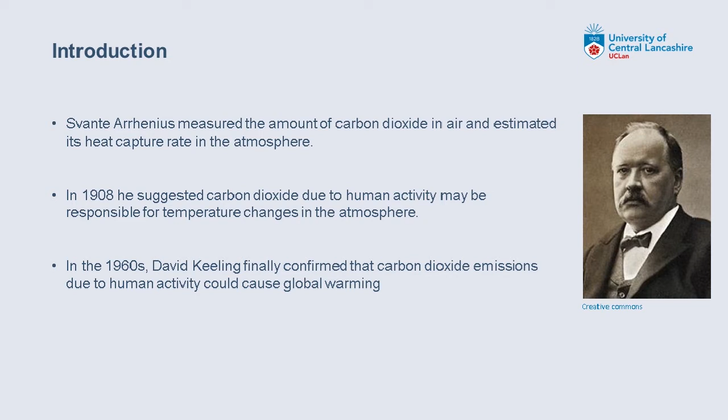Back in those days, climate warming was considered to be a good thing because scientists in those times thought that it would allow greater production of food. As we worked through the 1900s, it became more and more clear that climate change was due to human activity. And in the 1960s, David Keeling was the first person really to get a good grasp of the fact that human activity was definitely causing global warming. It still wasn't certain in a statistical sense, but the concern was so great that this organization was formed, the IPCC.

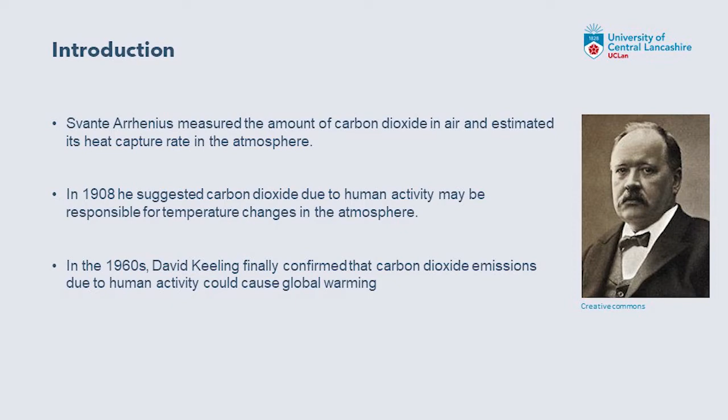The IPCC was established in the late 1980s by the United Nations and the World Meteorological Organization. And its objective was to provide a clear scientific view on the current state of knowledge in climate change, as well as observe its impacts.

The IPCC itself does not do any scientific research. It collects together scientific, technical, and other information from other authors and tries to produce an average of that information. And it produces occasional reports. So far, 5 assessment reports have been produced to advise government policy around the world. The next report will appear in 2022.

Some conclusions from the last report are quite disturbing. It's established to a 95% confidence limit that human activity is the dominant cause of global warming since 1950. Obviously, the increase in carbon dioxide in the atmosphere is causing this, and if we look at the changes in these so-called greenhouse gases over the last 800,000 years, levels are at their highest over that period of time. And much of that increase has taken place during the last 100 years or so.

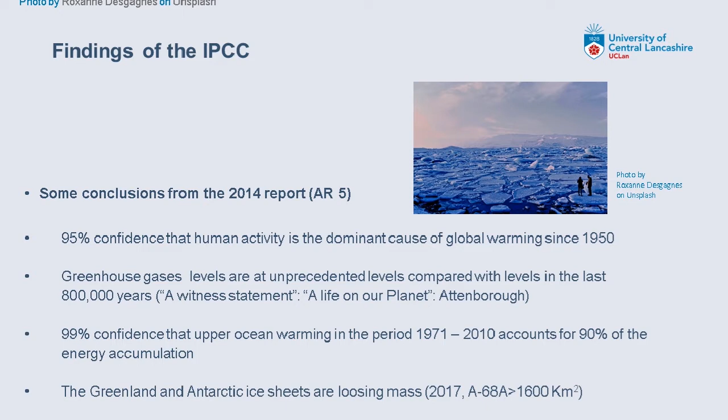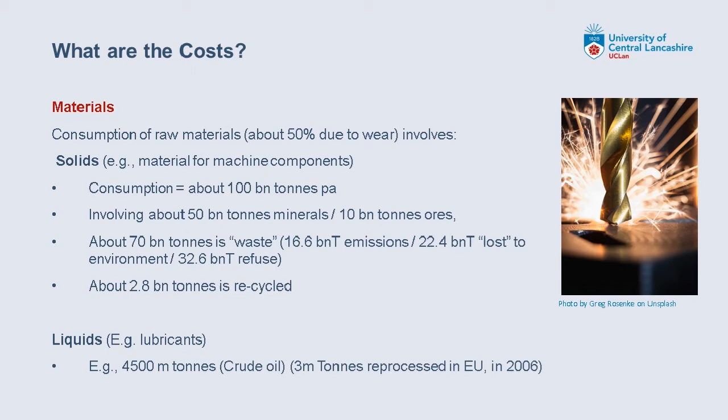We see a similar picture in the context of liquids. Across the planet, we consume a huge range of different types of liquids. Obviously, one of the ones that's relevant to tribology is lubricants. And globally, we would use about 4,500 million tons of crude oil, and much of that will be lost into the atmosphere or lost into the ground rather than reprocessed. You can see this very small figure of 3 million tons being reprocessed in the EU in 2006.

So what can we do about that? Well, back in 1966, Lord Bowden invited an industrialist called Peter Jost to try and identify what was causing the very large amount of money lost in maintenance costs. So the UK was still recovering from the Second World War, and we'd seen the very rapid installation of machinery for conventional manufacturing, moving away from the defence industry. That had been done very quickly and very suboptimally. So by 1966, a large amount of money was being used to try and maintain this equipment.

Peter Jost and his panel, which you see here in a room in the Institution of Mechanical Engineers on the right, were invited to try and understand why this was happening and to offer proposals to the government to put this right. They produced a report which is commonly known as the Jost Report, and you can see the copy from the University of Central Lancashire there on the right of the slide, quite well used.

And within this report there were a wide range of recommendations, including things like establishing a network, in fact, of national centres of tribology, recommendation to teach the good practice in tribology in universities and so forth. One of the interesting factors was that the economic savings were very significant, in the hundreds of millions of pounds even in the 1960s. And only a small proportion of these savings were related to reducing energy use. Energy was cheap in the 1960s compared to where we are now, and this was a very small component of their thinking.

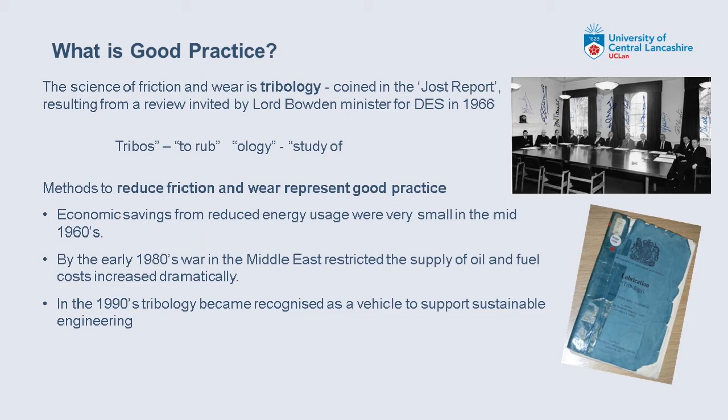So one of the things that the Jost Report recommended was good practice in tribology. Tribology is focused on operating devices more efficiently to reduce friction during operation, and also minimizing wear to reduce the use of materials, and also to reduce energy use during production processes as a secondary effect.

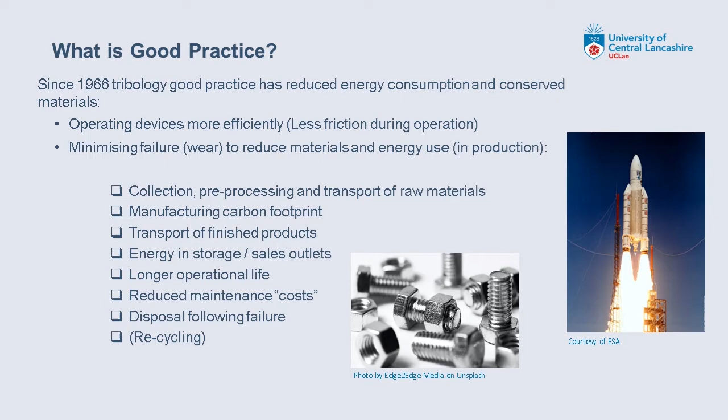And we can see that in that situation then we reduce the collection and pre-processing and transport of raw materials, we reduce manufacturing carbon footprint, we reduce the amount of transport required of finished products, and so on. So it starts to be a very positive feedback loop which is generated by using fewer materials and reducing wear. And as you can see, it covers a whole range of applications, from simple tribological components like nuts and bolts, threaded fasteners, right through to spacecraft.

However, as time has gone by, the impact of tribological development has begun to increase. One of the important trends that we see in engineering is that people expect to be able to operate at bigger loads, higher energy densities, higher speeds, lower weight, reduced cost, and increasingly with a lower environmental impact. And tribology, for decades now, since the 1960s, has facilitated this by a range of interesting and different trends.

So one of the trends, for example, is the use of lower viscosity lubricants. And if we use lower viscosity lubricants, we can reduce viscous drag and reduce energy loss in hydrodynamic contacts, for example. One consequence of that is that the lubricating films in these contacts get thinner and thinner, and I'll come back to that in a moment.

We also see the development of environmentally friendly lubricants, probably better described as environmentally adapted lubricants. They are less damaging to the environment, but in many instances their performance is also not as good, so they decompose more easily and they have poor compatibility with other materials such as rubber seals, for instance.

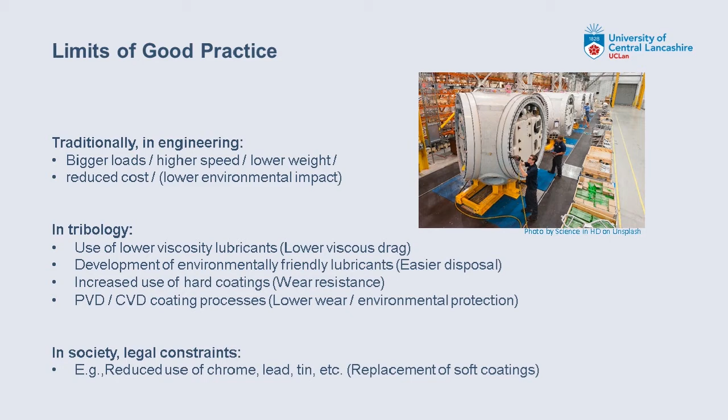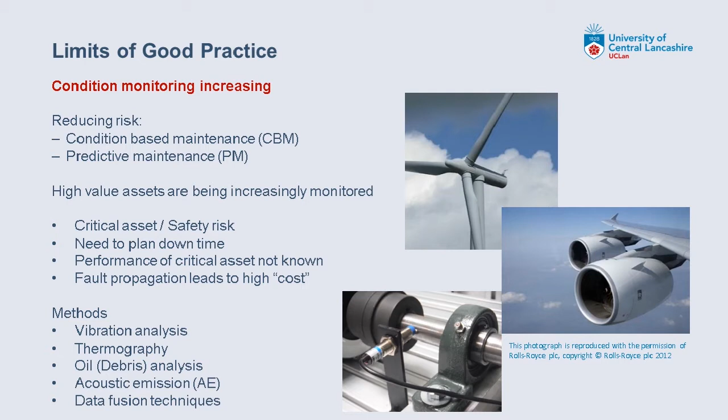And we would apply these kinds of techniques where an asset would be a critical asset in a large system, where there's perhaps a significant safety risk, where we need to plan the downtime of a machine for maintenance, and perhaps where we've got a new kind of device, a critical asset, and its performance isn't known. Anywhere where fault propagation might lead to a high cost. And we've got this wide range of different kinds of measurement methods as well to apply, so vibration analysis and acoustic analysis and thermal analysis and so on.

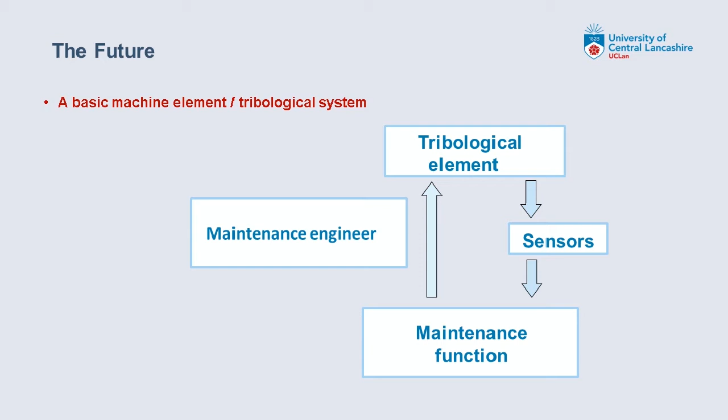And we operate this kind of scenario within a loop like this. So the tribological element is monitored by the sensor. The sensor allows data to be observed by a maintenance engineer. The maintenance engineer at an appropriate time then would go and apply either perhaps a replacement part or some kind of maintenance activity on the tribological element. And the increasing use of sensors means we can do this in a more and more efficient way.

However, what I'd like to propose is that we move to a more complex system in which the tribological element is monitored by the sensor, and the sensor sends its output to a control unit which can automatically operate an actuator to modify the operation of the tribological element. And you can see associated with this there can be a user interface, so this tribological element can be monitored, and we can also send information to machine learning systems, which might be web-based or might be part of embedded intelligence in the machine, so that machine elements can operate in much more optimal conditions.

This might seem far-fetched. However, I'd like to draw your attention to the fact that things like automatic braking systems have become very commonplace over the last couple of decades. Most cars have automatic braking systems now to control wheel skidding. So if each of the wheels on a car has its rotational speed monitored, if we apply the brakes and 3 of the wheels are rotating but 1 of them isn't, then the automatic braking system can do something, perhaps release the braking pressure on that specific wheel, to allow it to rotate and allow the driver to retain control of the car. This is a Tribotronic system, and it's very common, it's very widely applied.

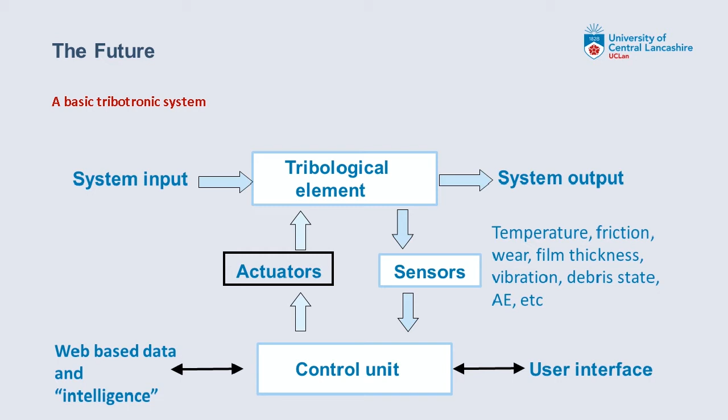Also in automotive applications, we've got things like automatic gear changes, automatic transmissions. And within these transmissions, we have actuators which can control the contact pressures on the transmission elements as gear changes take place. Again, entirely automatically through a feedback loop like this, completely without the knowledge of the person driving the car.

In addition to this, we see lots of other trends taking place in engineering as well, which we can take advantage of in order to build our tribological elements. So we have low cost, embedded intelligence, sensors, we have communications technology such as Bluetooth, we've got internet connection of machines through the Internet of Things, and we've got smart materials and smart coatings that allow us to do increasingly helpful things in terms of being able to have self-repairing parts which communicate their condition perhaps through thermochromic dyes and so forth.

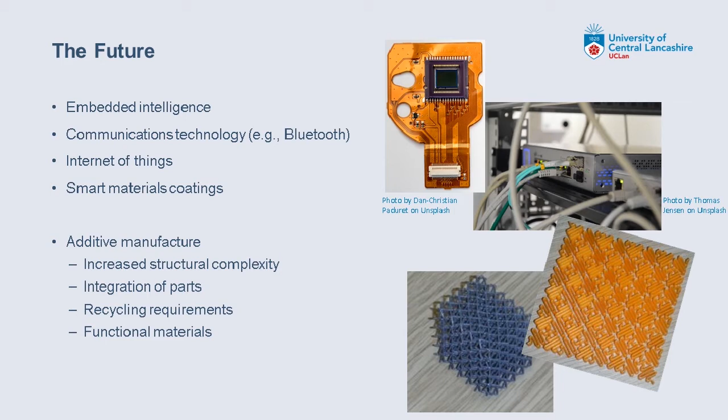We also have the very rapid development of additive manufacture, which we can use to manufacture parts which would hitherto be either very expensive or impossible to manufacture through conventional techniques. And we can build these parts that have functional properties as a consequence of their geometry. We can integrate sensors, we can make them so that they are more recyclable, and indeed we can build these parts out of recycled materials. And we can also incorporate functional materials within the structure of these different kinds of parts.

So if we think about the evolution of a bearing and how it might look in the future, on the left-hand side, perhaps 3 centuries ago, a journal bearing was a straightforward circular cavity into which a rotating shaft might sit, perhaps either dry or with some kind of basic grease-type lubricant.

And as we've moved through the centuries and through the Industrial Revolution, this arrangement has become increasingly sophisticated. The spacing between the shaft and the bearing has been more accurately tailored to the function of the device. We've begun to understand in the 1800s how we can predict things like the load carrying capacity of the bearing, where to put the grooves, where to put the oil supply hole, and so forth.

And as we've moved through the 20th century, we've gained control of the materials of this component. So the microstructure of the coatings and the microstructure of the material of the bearing have improved and allowed the performance of this device to get better. And where we are at the present time now, we have these quite sophisticated components, even though they might look outwardly simple. We're beginning to use asset management through condition monitoring and predictive performance.

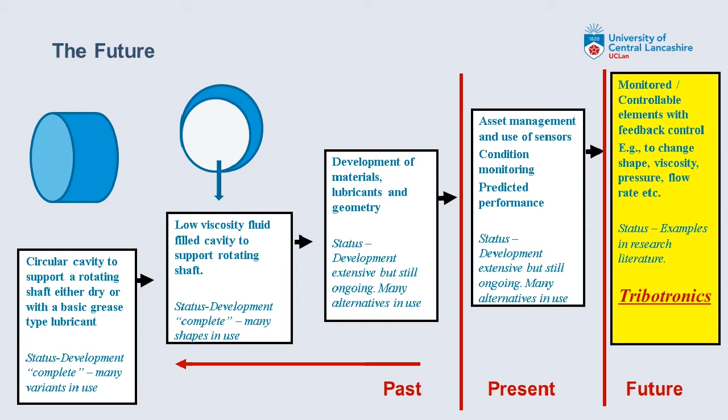What I think we'll add in the future are these controllable elements with this feedback loop that allow us to directly change the properties of these devices, changing their shape, changing the viscosity of the lubricant, changing the flow rate of the lubricant, and many other properties of these devices to both keep them operating longer and to make them functionally more effective. Tribotronics, a feedback loop involving sensors and actuators.

At the University of Central Lancashire, we've been developing different kinds of tribotronic components now for some years, and I'd like to show you a few examples. This first example here is a lip seal. You can see on the top left the structure of a lip seal. At the bottom, unfortunately I can't point to these slides, apparently there's no pointer in the system, but at the bottom of the lip you can see the shaft, and that lip is pressured against the shaft using a spring that's built into the device and the natural compliance of the seal itself.

The graphs to the left are effectively derived from simple capillary models of the contact, but the purpose is to try and illustrate how this device behaves. So on the top graph you can see that as the film thickness between the shaft and the lip seal increases, the flow rate, or leakage if you like, of this device also increases. On the bottom slide you can see that as the film thickness increases, then the power loss goes down.

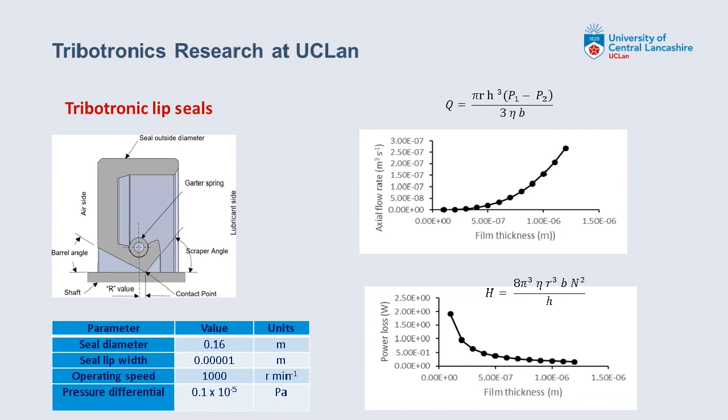Another project that we've got is to develop a feedback control system for a large two-stroke marine engine. These engines operate with an isolated cylinder because they use very low quality fuels. There's a lot of sulfur in the fuel, and that generates sulfuric acid during combustion processes, and the arrangement prevents these sulfuric compounds reaching other parts of the engine and causing corrosion. As a consequence, lubricant is supplied to the top of the cylinder by a spray, and this lubricant conventionally will contain an alkaline additive to counteract the production of the sulfuric acid.

So as the engine might increase speed or need to increase power, a larger amount of lubricant is injected into the engine in order to make sure that an appropriate quantity of additive is supplied to compensate, to reduce the corrosion. However, that means that far too much lubricant is injected into the engine.

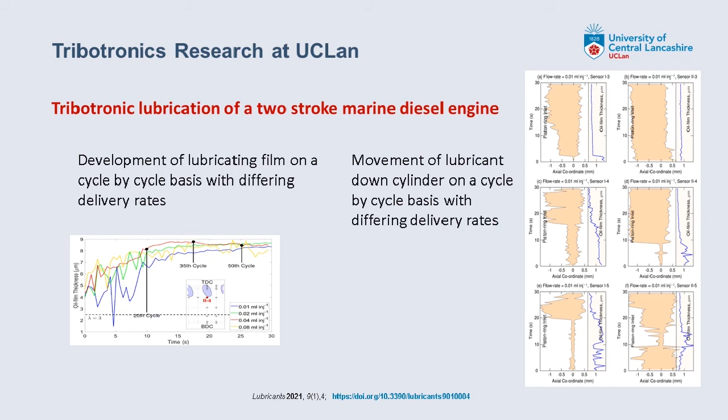So you can see the top two are filled fairly quickly, time starting at 0 at the bottom on the y-axis. But the lower down that the sensors are placed in the cylinder, the longer it takes the lubricant to arrive there and start to do its job. Now, this might be quite obvious, but until this test equipment was built, nobody really had any idea of how many strokes or what period of time this process took.

Some of the advantages that we can think about might be derived from a system like this if it was fitted on a ship. First of all, that it does separate the lubrication system from corrosion control system. And the value of that is that it does permit very large quantities of lubricant, in principle, to be saved by this device.

Of course, there's a double benefit. We get lower emissions, as I've explained. So we see lower amounts of carbon dioxide going into the atmosphere. The operator sees a benefit from a lower operating cost. We should have better corrosion control as well, because it's not good to supply too much or too little of the additive to counteract corrosion.

And it's automatic. I'll come back to that in a little while. And it's also bespoke to each system. So each ring and each cylinder can moderate itself independently in order to control these parameters.

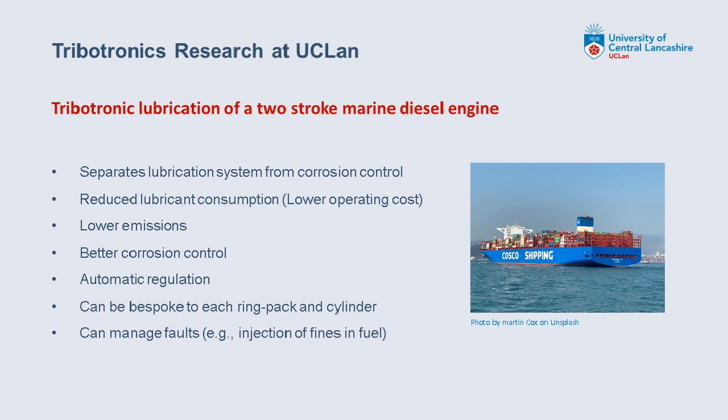Finally, this is a project that we've just started recently. Tribotronic control of tilted pads. Tilted pads are used in a wide range of applications. They may be quite small on the scale of millimeters, or they might be quite large, as in this example. If you take one of these pads, it's probably about the width of a couple of adult hands. And these pads are used in applications like hydropower stations or submarine propellers, that kind of thing.

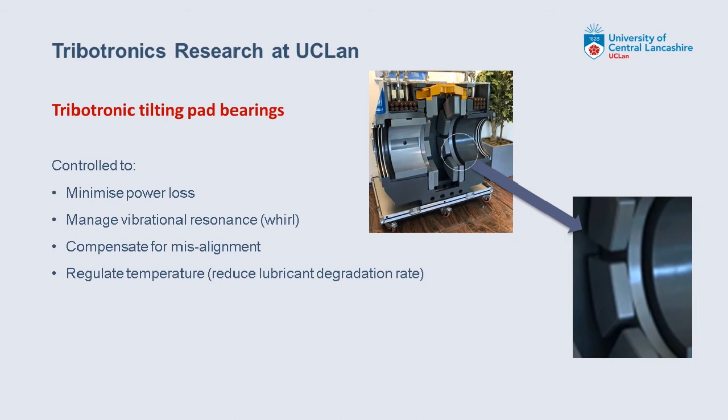And controlling them should offer some useful opportunities. So we should be able to minimize power loss, for example. We should be able to manage their vibrational characteristics, certainly move around from their resonance points. We should be able to compensate for misalignment and regulate temperature to reduce the degradation rate and have longer lives of lubricants.

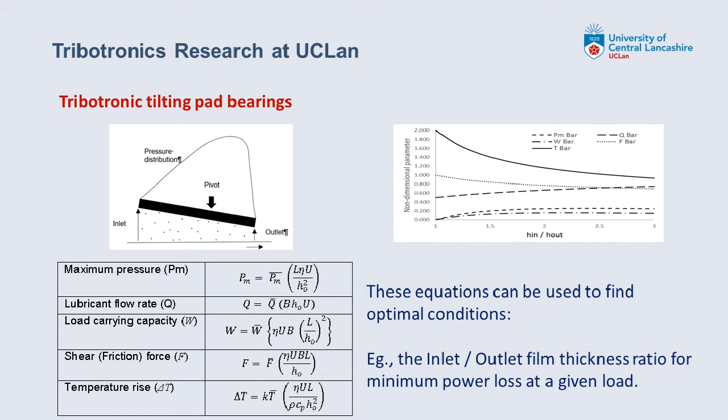And the other curves represent other parameters such as the load carrying capacity and the required flow rate to keep the bearing operating. And you can see that as you move backwards and forwards along the x-axis, then the ratios of these lines change. So we can, for example, change the outlet temperature without too much penalty in load carrying capacity by changing the inlet to outlet film thickness ratio, perhaps with an actuator.

As academics, at least, we're very used to creating models to try and understand, try and predict what might happen in engineering systems. Tribologists do this all the time. It's very helpful to be able to do that. And what we aim to do is to try and get a match between our experimental data and our model. It's not essential that we understand a system in order to be able to control it.

So if you think about your house, for example, you've got a central heating system and it's a feedback loop, yes, but you don't need to have a model of the thermal heat loss of your house in order to heat it effectively. What you do is allow the automatic control system to adapt to the conditions of each individual house. And the same is true in Tribotronics.

We can use these control systems to control these devices without a thorough understanding of the principles of operation of that component. However, as academics, often we try and build these models, and certainly that's what we're trying to do in the case of the examples that I've shown you today. So fundamental models are useful for these devices, but they're not an essential prerequisite to being able to build a tribotronic device.

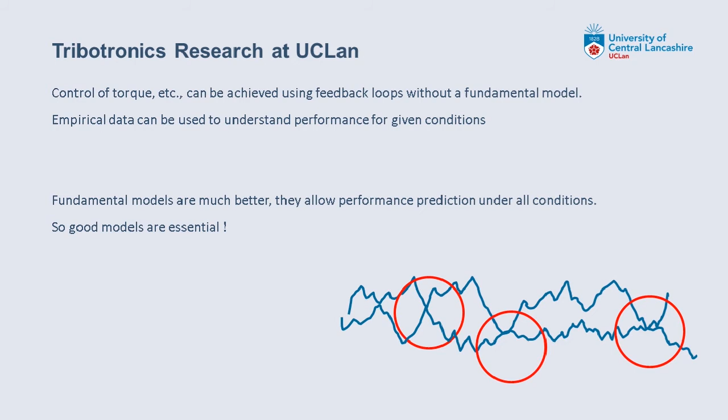Coming to the end of the presentation now, and what I'd like to suggest to you is that tribotronics is the next step of development of tribology, which gets us over this issue where we are reaching the end of the line, the end of the curve in our development possibilities in design. The curve is flattening out. It might be that early tribotronic devices are not particularly elegant, not particularly convenient solutions, but as we implement more and more of them, they will become elegant, rather like the automatic braking systems in cars, for example.

They offer a lot. They offer machine information, user information about the machine to the user. They offer a managed life, which should give us greater reliability and a longer life. They offer us more functionality, so we can control different aspects of their operation at different times. They offer increased autonomy. We can actuate their capability and performance automatically to suit our needs, as I've explained. And there is the possibility of communicated learning as well.

So if we think, for example, about a field of wind turbines, if there is an abrupt, potentially damaging gust reaching the first wind turbine in the field, it gets sensed by one of the bearings in that system, it can send a message to all the other wind turbines in the field, warning that that damaging gust might be coming along, and allow those machines to accommodate a different operating condition that can compensate and protect against that potentially damaging gust.

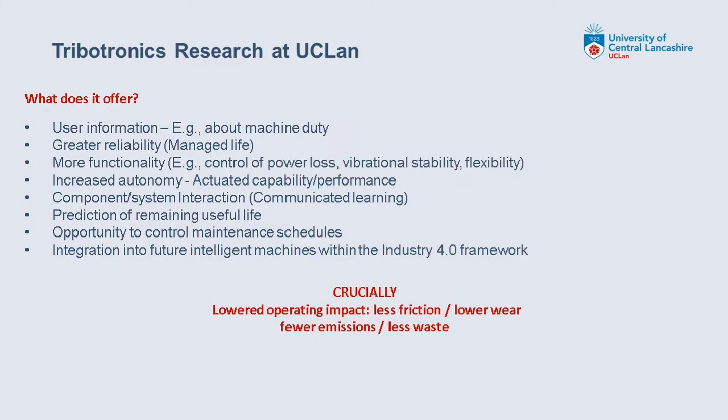Yeah, that data was taken from the paper by Kenneth Holmberg and Ali Erdemir, and I'd like to suggest that the questioner has a look at that. I'd be happy to, in fact, I can probably go back to the slide and show the reference. I think slide 9, if I may change the slide for you. Have a go. Okay. Just bear with me a second here. I think I'll just jump to the slide. Okay.

Thank you very much. I will go to the second question, which is a bit of a longer question. I will try to summarize it, if I may. Regarding the practicalities of using actuators on tribological elements. Let's say if you have a machine with several bearings on a turbo expander generator set with a gearbox, all the bearings on the turbo, gearbox and motor share the same lube oil system, obviously, probably in most applications anyway. If one bearing is starting to get hot on the gearbox high-speed shaft, how would an actuator assembly then respond to increase the life of that component?

Yeah, I think development of the actuators is probably the biggest challenge in the subject. And certainly when we are doing our research, it takes us some time to trial different approaches to different kinds of actuators. But in this situation, I would envisage that every bearing has its own set of actuators and its own control system and can operate independently. So probably an intuitive solution will be to use an actuator to increase the film thickness on that one bearing, so that it can compensate on its own account. Yeah.

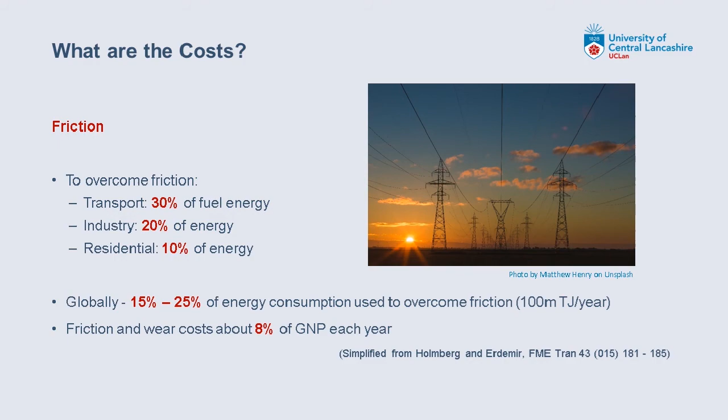It's a difficult question to answer because there are certainly hydrodynamic bearings in power stations, for example, that have been there for decades and which work perfectly well because they're hydrodynamic and properly designed. They don't necessarily wear so much. Perhaps any damage that might result will be cavitation damage. I guess it depends on how good the bearings that were installed in the first place were, whether they were top of the range or bottom of the range. But power loss is dependent on film thickness for a hydrodynamic bearing, so it depends what film thickness they're operating at.

But it depends. I mean, these kinds of bearings fail by a fairly statistical process. So the lifetime of the bearings in whatever application will follow quite a clear statistical pattern. And there's always an argument about if a device is old but still operating, should it be replaced to operate more efficiently? But the problem is that obviously you use a lot of material, a lot of time, a lot of energy to replace it. So from an environmental perspective, it might not be worth replacing. But from a day-to-day operating cost perspective, it might be. It's not an easy question to answer.

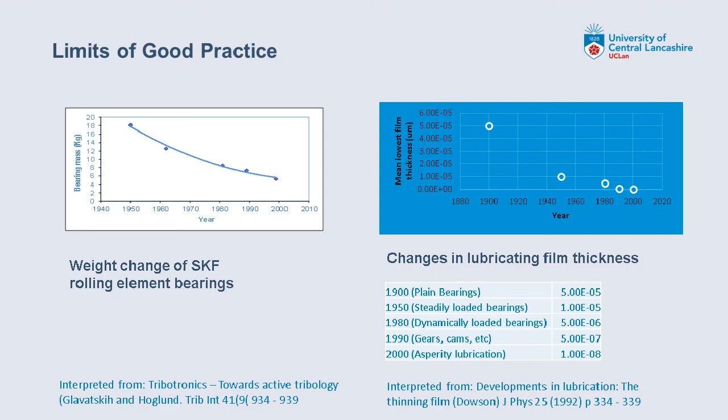I think it probably would. It depends on what else is in the system. Soot particles in combustion processes are obviously problematic. A large proportion of the emissions that come from ships in particular come from the fuel. And so the proportion of emissions that come from the oil or the lubricant are less.

But it certainly would reduce the particulates, but the question is by how much, and I've no experience to be able to answer that question. Of course, okay.

Another question here, how does your Tribotronics proposal for low-speed 2T cylinder lubrication differ from the existing commercial OEM offers, such as Alpha lubrication system from MAN, maybe?

These systems that are used currently are spray systems, and typically the way that the spray systems are operated is that they start the engine, a new engine would be running with the spray system implemented, and they would turn down the feed rate as they test the engine over a period of days and sample the lubricant from the stuffing box to look for debris particles from the engine. And when an appropriate level of debris particles is agreed upon, then that's the feed rate for that engine.

It's tricky because this feed rate depends on the operating conditions of the ship. So it's been found, for example, that sea state can change the operating film thickness in the engine. And so this isn't really a complete feedback loop system. It's a system that looks at the load on the engine, looks at the speed of the engine, and determines a feed rate based on those two parameters. So it's not responding to the lubrication requirements of the engine.

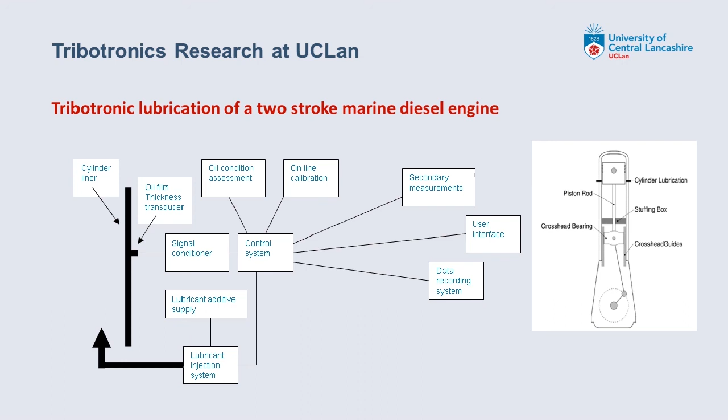Quite interesting, actually, in the UK, we still have a fairly small proportion of electric vehicles on the road compared to many countries in Europe, and I think we're a little bit behind in that aspect. However, I don't think the tribological challenges will go away. I think we'll also see, in some applications, increasing use of gas and hydrogen-powered vehicles and power generation, both static and moving power generation.

So the landscape for tribology is never static, and it won't remain static. We'll get these hydrogen power system challenges. I think we'll have challenges too in electric transport, which we can address and certainly apply our tribological experience to, and address these challenges. Excellent. To future demands. Yeah, thank you very much, Ian.